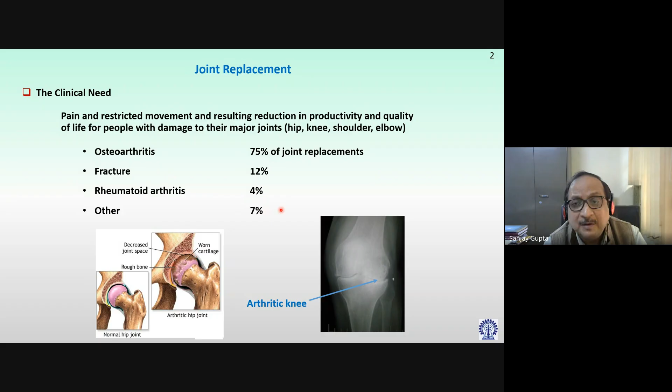Now, if we look at the treatment, let us take, for example, one of the load-bearing joints. I hope you understand what is meant by load-bearing joints, because the upper part of the body, we have upper and lower parts. The lower part provides us stability against loads, meaning forces. The upper part, as compared to the lower part, gives us more mobility than stability.

If we consider the shoulder joint, that is probably the most mobile joint within the human body. The shoulder joint provides the maximum range of motion. However, the joint is less stable as compared to the hip joint, which is essentially a ball and socket joint.

Now, we will be concentrating more on the hip in this lecture, because that gives you some idea of the unique problems associated with joint replacements. There are some common problems and certain unique problems related to specific joints. So we would focus this lecture mostly on hip replacement.

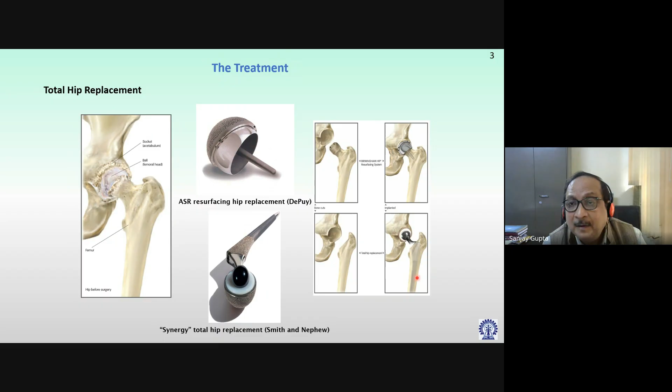Now, the next question is how to fix the implant with the host bone. So we have a cemented type of fixation, and there is also uncemented type of fixation. Cemented fixation, which is an age-old method of fixation of the implant to bone, consists of a material called bone cement.

It is similar to our building cement material, with some properties quite similar to it. It is basically a polymer, polymethyl methacrylate, PMMA, and when mixed with the monomer, it solidifies with time and helps the implant to be fixed within the host bone.

The cemented fixation gives us almost immediate fixation of the implant with bone, but there are certain unique problems related to cemented fixations. On the other hand, we have uncemented fixation, which is more common nowadays because of the inherent problems with cemented fixation.

Uncemented fixation, as you can see here, has basically a biological fixation of the implant with the bone. This is all about osseointegration, as the clinical world commonly calls it—they look at the fixation problem between implant and bone as osseointegration, or the degree of osseointegration. Higher the degree of osseointegration, the higher the strength between the implant and the host bone.

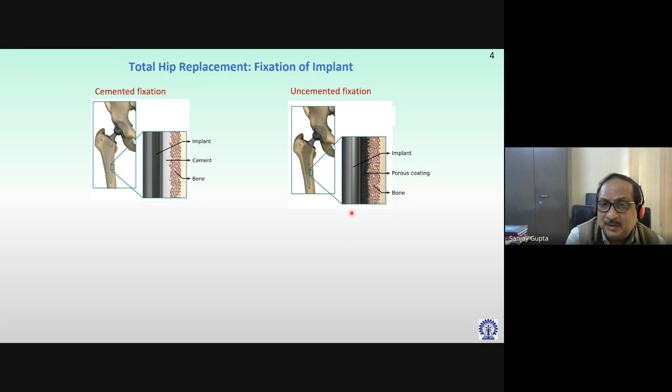If we look more closely into this figure, you can see that bone and granulation tissue actually grow inside the porous layer, facilitating osseointegration.

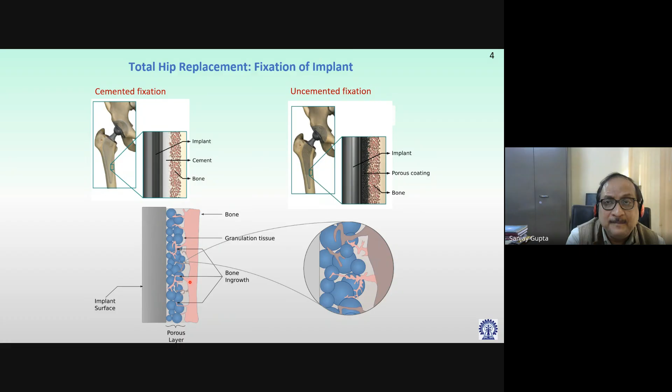Now, when we are taking up implant designs and analysis, the first thing from an engineering point of view, for any application, is we must be aware of the failure mechanisms—that is the worst case scenario. What can go wrong?

Now, the failure mechanisms from the last 30 years of research have generally been of 3 types. Accumulated damage failure scenarios, where the interface stresses lead to implant-bone interface debonding. The interface stresses within the implant-bone configuration may be too high to withstand the interface bond strength, so if the stresses generated become higher at any point than the allowable limits, it will lead to failure.

There is also excessive implant-bone relative displacement that affects the primary fixation. So when you press fit, what is press fit? Perhaps you know that when an object is forcefully pushed inside a cavity, that is called a press-fitted scenario. The object has a slightly greater dimension than the available dimension of the cavity. This situation is often adopted by surgeons to fix the implant primarily inside the bone, so it helps in primary fixation.

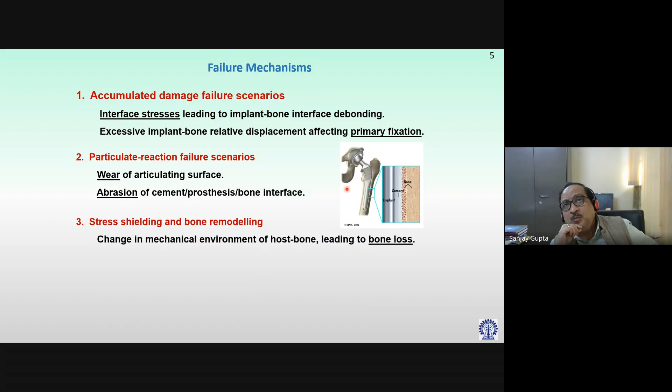Now, how do we assess all these problems? The first thing that needs to be addressed is: is the implant sufficiently well designed to address all these various scenarios? The answer may be yes or no - we don't know. How can we know? There are two ways. One is the clinical way - you implant it within some patient and wait for clinical feedback, which is dangerous to some extent, because the adverse effects of failure will affect the patient.

So over the last 30 years, there has been a huge effort that went into preclinical analysis - that is, using finite element models and finite element analysis based on precise CT scan data of patients, both for natural bone and implanted bone. And it has tremendously contributed towards orthopedic research to test and validate clinical hypotheses.

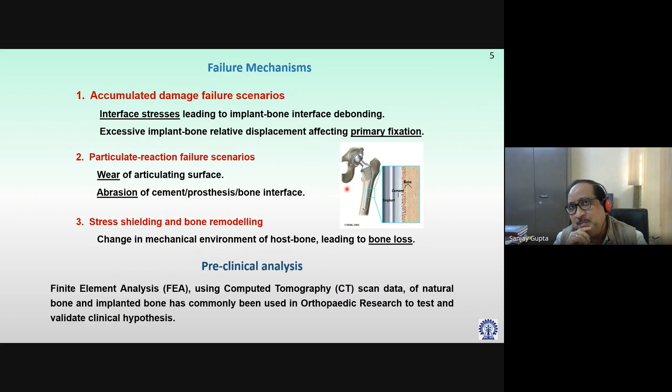So we call that procedure in summary preclinical analysis. I would focus my lecture more on this preclinical analysis and also on validations which are necessary to accept the predicted results coming out of these finite element analyses.

Let us consider, for example, hip resurfacing arthroplasty. How did we define that this was a surface replacement? Essentially a surface replacement - the articular surface is machined and an implant is inserted. Now, it has been observed in clinical studies that immediately after surgery, when the patient is trying to come back to normal life, femoral neck fracture is reported as the most common short-term failure mechanism.

In the long term, there has been also the effect of stress-strain shielding leading to bone remodeling, finally causing implant loosening. So both the failure mechanisms actually affected directly the patients, and this was highlighted in 2008 Journal of Bone and Joint Surgery, American volume.

And I had the opportunity to work with DePuy Johnson & Johnson in the United Kingdom. During that time, there were big investigations on the mechanical causes of failure that was leading to the biological failure of these implants. It was found that stresses and strain actually are causing the short-term and long-term failures. So I'll try to explain in short how these things were done.

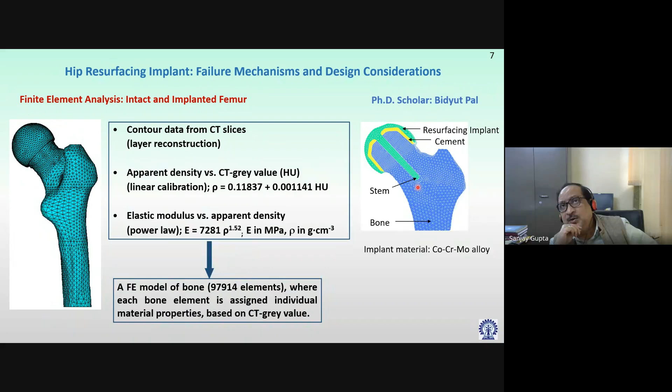Now, where we actually tried to intervene and change the surgical procedure in such a way so that this implant can be beneficial. It not only led to change in the surgical procedure, it also led to change in the design of the implant.

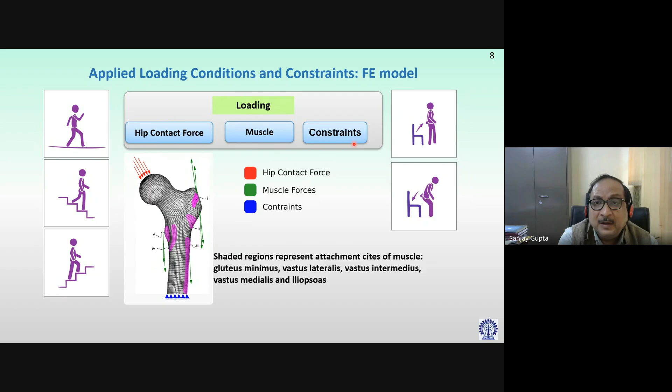Now, what is this adaptive bone remodeling? It is a phenomenon of the bone tissue that explains the response of the bone tissue to significant alteration of its stress-strain mechanical environment. Remember, the whole bone remodeling simulation, as I explain, is based on loads. There are other factors, like metabolic factors, that can also affect bone remodeling, but the predominant factor that affects bone remodeling after implantation is load driven.

Let me explain in a short and easy way how we actually do the formulation and implement it in the form of computer simulation. Bone adapts its structure in accordance with the altered mechanical environment by the process of bone resorption, which is essentially an activity of the osteoclasts, and bone apposition, which is an activity of the osteoblasts. The rate of bone loss or gain is basically related to the difference in the mechanical stimulus. This is a very important parameter that governs the bone remodeling process.

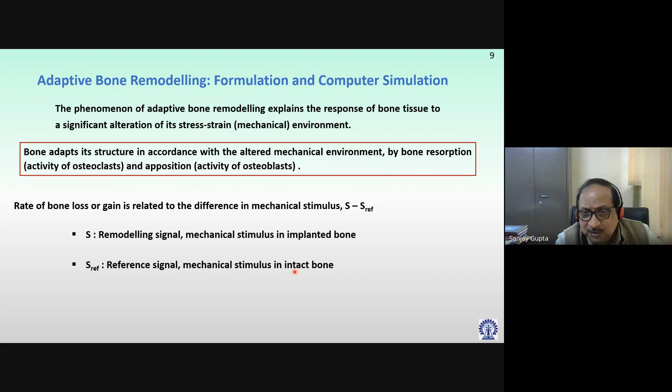One is after implantation, the other is before implantation. So the difference is basically the driving force that triggers bone remodeling, as I already said. Now, what is this mechanical stimulus?

Mechanical stimulus is strain energy per unit of bone mass averaged over the loading history. These are all solid mechanics terms, commonly used for structural analysis of machine elements or structural elements, and these are very common words.

People from technical backgrounds, particularly mechanical or civil engineering students, know this pretty well. Here the elastic strain energy UI per element corresponds to a load case. Then we have the total number of load cases. As I explained, we have load cases arising from different physiological activities. If it is 5, then the number is 5; if it is 4, the number will be 4. And rho is the bone apparent density.

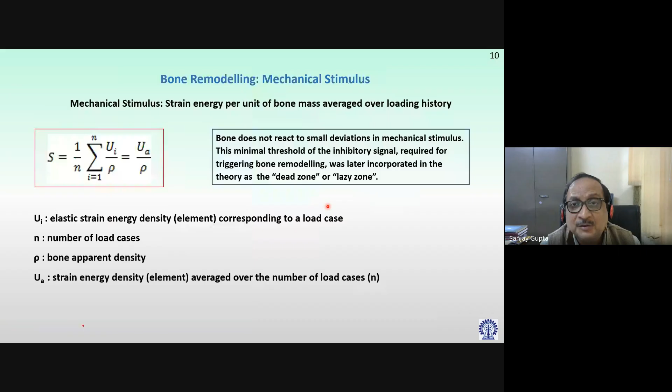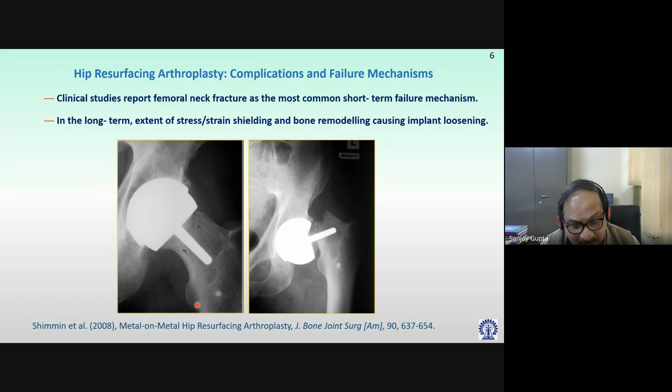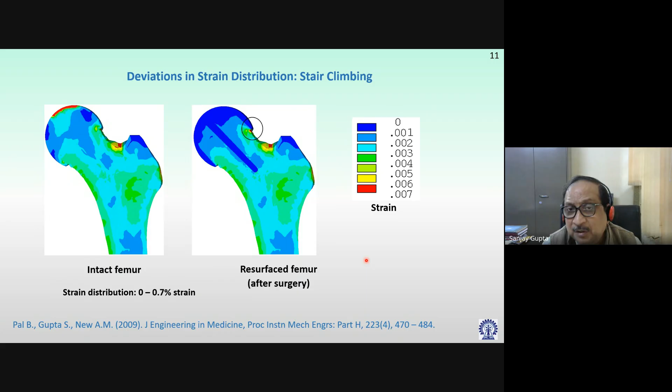If I go back, you see here a black line progressing from the top superior part of the femoral neck and progressing towards a catastrophic failure of the whole new surgical construct. We had published this work quite some time earlier, in 2009, and thereafter you can see this is the area which is triggering the crack initiation and crack propagation inside the implanted bone.

I just gave you a glimpse of how these predictions from numerical simulations are useful in identifying some clinical failures, which are actually difficult to analyze using just patient feedback data. Now, clinical failure is something which is real, okay?

Computer simulation has a lot of problems, okay? Personally, I've been working with it for more than 30 years, and I don't believe computer simulations, okay? For some people it's a holy machine - everything that comes out of a computer is acceptable. For me, no, it is not acceptable, okay? You never know where you have made mistakes - you might have made mistakes in input variables, you might have made mistakes in procedural steps. And finally, what comes out of the black box, whether or not it is useful or irrelevant, depends finally on experimental validation and verification.

So we had undertaken this project in collaboration with the University of Southampton under the UK-India partnership program, and our PhD student had done some experimental validation. We had designed and fabricated a special loading mechanism, as you can see on the right, that simulates the loading of the hip as it would be in a natural femur. Then this had an implant, as you can see here, the shiny resurfacing implant. And of course this bone is not real bone, it is synthetic bone - it's called Sawbones, quite expensive to get, and we fortunately could afford it from our project.

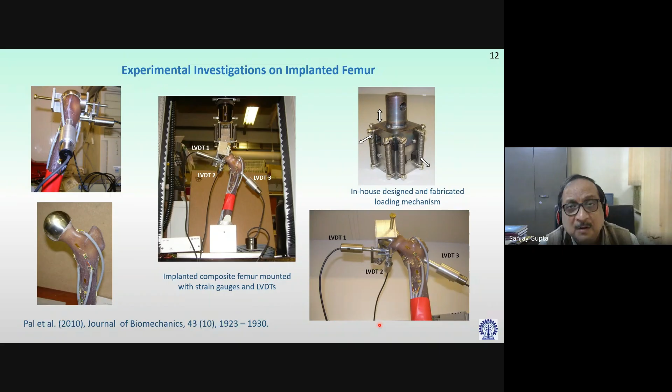Now, when we compared experimental strain versus the numerically predicted FE strain, we did get some very good agreement. This is all about statistical analysis, and I hope many of you are conversant with it. You have to really compare the raw data of the measured strain versus the finite element strain predicted by the FE models. And this is what we get.

So R is 0.94, slope 0.86, with intercept minus 109 microstrain. In case of resurfaced femur, we see an even greater correlation coefficient and less intercept. The slope is supposed to be actually more close to 1, and the intercept, as you know, y equals mx plus c, so if it is fully in agreement, then slope m should be equal to 1 and c should be equal to 0.

But this is not always the reality. Reality is when we actually test data. So the symbols basically indicate strain gauge output for all load cases. But we, in a way, may conclude that the finite element models are actually predicting values which can be accepted for clinical relevance.

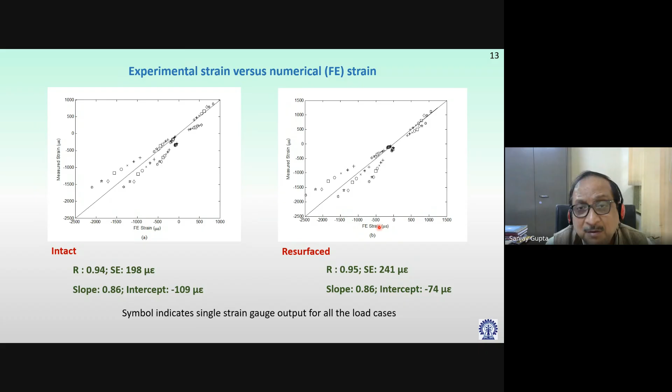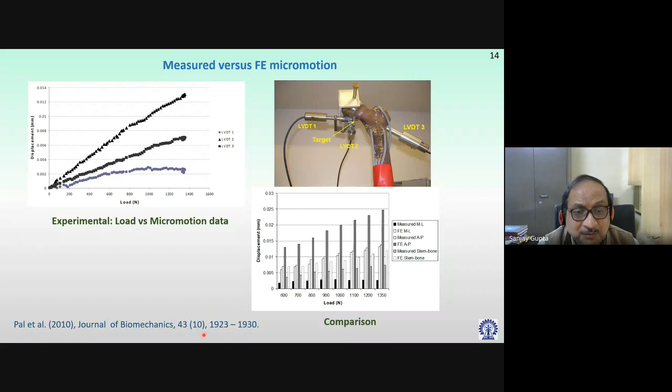If you compare measured and FE micromotions, micromotions actually mean implant-bone relative displacements. Here we are comparing along different directions. This is the measured values, load versus displacement. Displacement actually means implant bone displacements, and the comparison is reasonably acceptable. We published this in the topmost journal of our field, the Journal of Biomechanics, in 2010.

Now, we did come up with predicting successfully the causes of failure. But what is the step forward? The implant was eventually removed from the market because there were many lawsuits against it, and so what we had taken up as a new project was to develop a new implant.

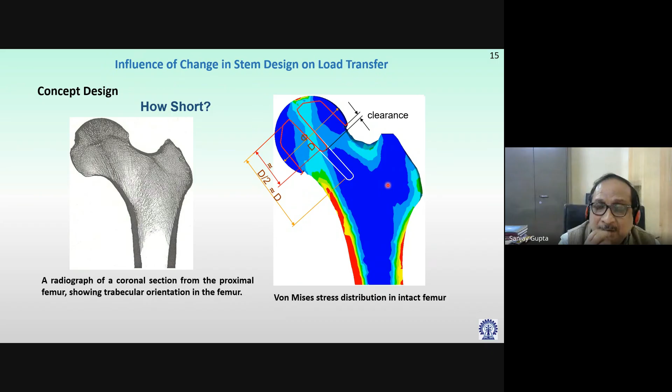We tried to modify the metaphyseal stem. The metaphyseal stem originally was this size. We tried to optimize the length of the metaphyseal stem. Earlier this dimension was equal to the diameter of the femoral head. Now we arrived at a dimension which is d/2, that is equal to the radius of the femoral head, the red line as you can see. And interestingly, this gave us a completely different picture of the stress distribution as compared to the earlier long stem version.

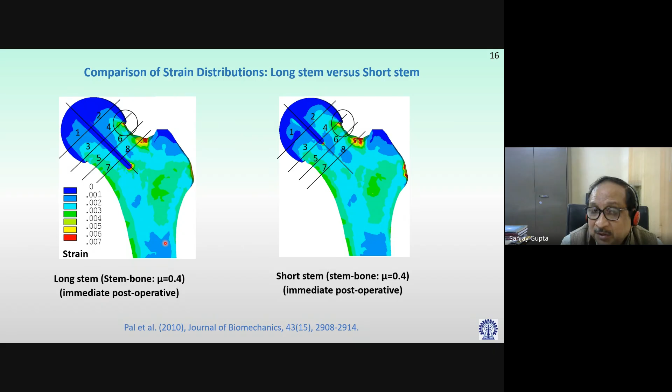So here come some of the results. For the long stem, we did simulate friction between the stem and the bone. This is the immediate postoperative strain distribution. For short stem, you can see here, the strain concentration is more at the tip of the stem. And although there exists some amount of elevated strains, this elevated strain was quantitatively less compared to the original long stem implant.

Now, what are the predicted changes in bone density if we compare long and short stem designs? You can see here for long stem, this is the predicted bone density changes based on bone remodeling theory. And in case of short stem, instead of bone loss, we actually see some bone gain in this region. If you compare directly the second picture with the third picture, after equilibrium in bone remodeling, we see a more favorable bone density distribution compared to the original bone density just immediately after surgery.

So bone density doesn't change immediately after surgery. This is basically the original configuration, and this is the configuration after bone remodeling, for short stem and long stem. You can see that this second figure gives a more favorable stress and bone density distribution as compared to the long stem design.

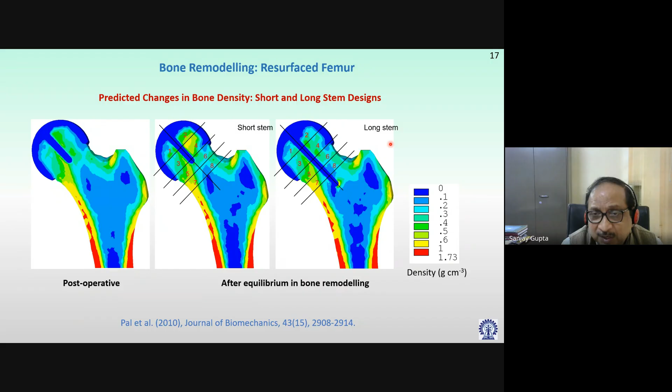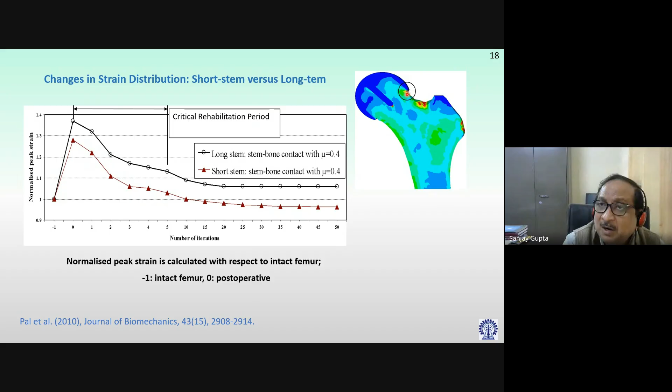So in many cases, the patient is advised to undergo partial weight bearing by using crutches, so that during this immediate post-operative critical rehabilitation period, you can avoid high strain and let the bone heal with time and offer more strength so that there is no failure initiated from the superior femoral neck junction with the implant that causes this failure.

Now, the next lecture I would focus on is on the pelvic bone and optimal design considerations of uncemented acetabular prosthesis. We had focused earlier on femoral implants, and now we'll be moving into the more critical acetabular component loosening.

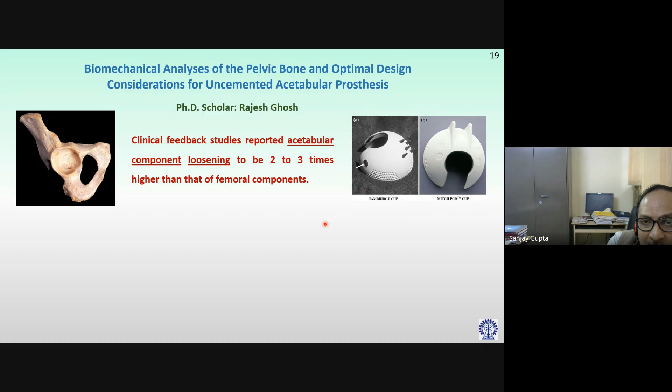Oops. What happened? Yeah, sorry.

Now, one of the major causes behind this aseptic loosening, failure of the implant, is considered due to mechanical factors. Combined with those clinical feedbacks and desired investigations regarding the mechanical factors behind these failures, there was another demand arising: for more durable implants, because more and more young and active patients underwent joint replacements, thereby triggering increase in the life expectancy of also the older patients. So coupled with younger patients and increasing life expectancy of older patients, the demand for more durable prosthesis serving the affected patients was increasing.

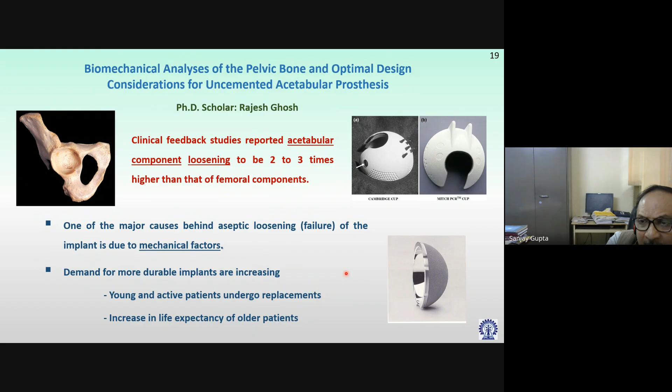So again, if we look into it, there is the same procedure of generating finite element models of the intact, natural hemipelvis and the implanted hemipelvis models based on the procedure I already explained. But here the equations are different because it is a different bone - pelvic bone, not the femur. So we have different calibrations for allocating bone material properties.

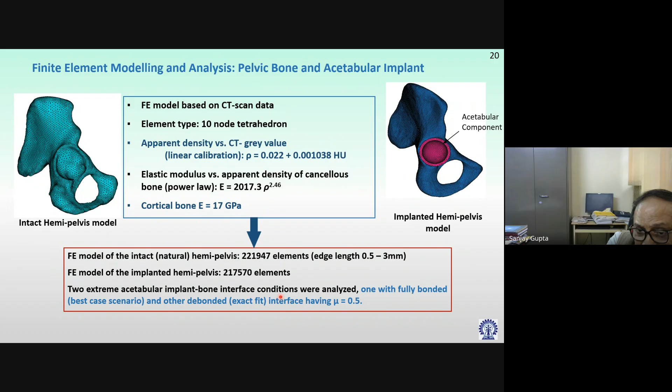Finite element model of the intact natural hemipelvis in this case had about 222,000 elements, and for the implanted it was also around 220,000 elements. Two extreme acetabular implant bone interface conditions were analyzed: one fully bonded, and the other debonded exact fit interface having mu equal to 0.5, where mu is the friction coefficient between the implant and the bone.

The constraints applied to these models were mimicking the physiological constraints, which is fixed boundary conditions at the pubis and the sacroiliac joint.

We had actually been very careful about how to distribute the predominant hip joint force from the center of the femoral head, how it will be transferred onto the pelvic bone. We actually modeled the cartilage layer in between, with bonded and debonded interfaces, and in a way we can mimic the natural load distribution from the femoral head to the acetabular cavity.

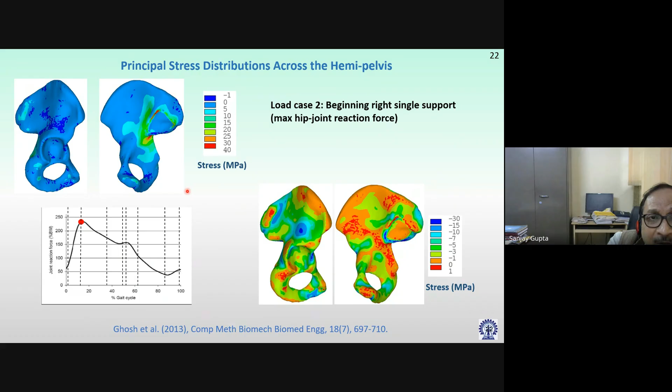Now this is the principal stress distribution. For the maximum hip joint reaction force, one is a tensile stress distribution, another is a compressive stress distribution.

Now again, we are critical, as I told you, about the results predicted by finite element models. After all, these are models, and you cannot believe results unless validated. So there was a new technique, digital image correlation, a non-invasive technique, and we tested the pelvic bone specimen using this DIC technique. It is a non-contact optical metrology to measure full field stress distributions and surface deformations on practically any material subjected to a driving force. The idea came from the aerospace industries, who had been trying to measure stress and strain distribution in aerospace components, so we adapted that method for testing bone samples as well.

But remember, this is a full field technique, giving full field deformation patterns and stress strain distribution. It's based on 2 cameras, and the specimen has white paint with randomized black speckle patterns. Through the cameras we can track the deformation of the speckle patterns before and after loading. There's a lot of mathematical transformation involved in getting results from this optical technique.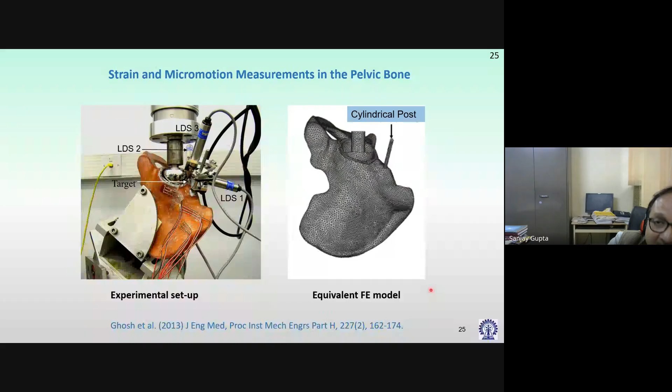We also compared the predictions with our age-old strain gauge technique. The paint was removed from the surface of the analog bone, and we fixed strain gauges and strain rosettes, as well as linear displacement sensors along 3 orthogonal directions, LDS 1, 2, and 3. We modeled this whole thing, generating the equivalent FE model, so we were in a position to compare the results.

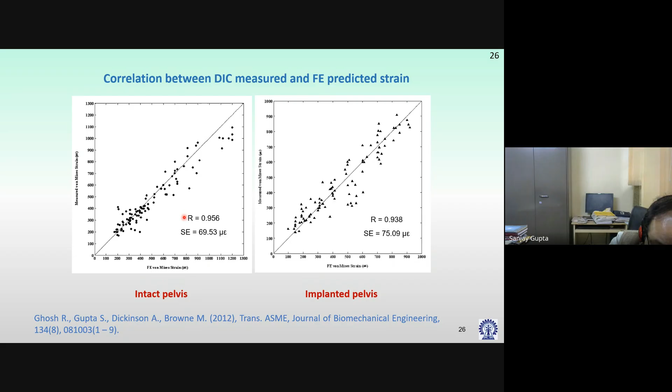So we were in a position to further investigate the consequences of inclusion of a prosthesis. We used another submodeling technique, used in the aerospace industry, to focus our attention on the acetabular region, because this is our region of interest. A pelvic bone is a large bone, but our main interest is what happens in the domain of inclusion of this acetabular component.

So we adopted this submodeling technique where we introduce cut boundaries and transfer the displacements from the original mother model, or the full model, at the cut boundaries. While incorporating this procedure, we are including the elastic properties of the remaining part of the pelvic bone, which we are not actually modeling. It's a trick by which, when comparing a full model with the submodel, we can see exactly similar stress distribution.

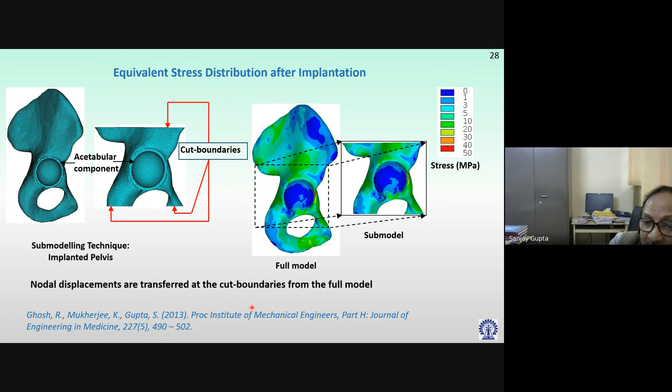However, if you look closely here, there is some deviation. This is because the full model is made up of coarse size elements, whereas here the size of the element is smaller. Therefore, the description of the bone material properties is better obtained in the submodel compared to the full model, which is rather coarse. So the finer the model, the better the predictions. But overall, both models gave consistent results, except at a few locations, since we have a finer model in the submodel. The idea was transferring the nodal displacements at the cut boundaries from the full model to the submodel.

So with that basic model at our disposal, we were in a position to assess all the failure mechanisms that arose basically out of clinical feedbacks. Now, on the left, you have the bone density.

So this is basically the bone density for the intact bone. You can say immediate post-operative means intact, because the bone density doesn't change immediately after surgery. After bone remodeling, this is the metallic prosthesis. You can see how bone density has reduced.

So the blue means less. Just a moment, why don't I see the... Oops. Yeah.

The color blue is actually less bone density. When you move towards more red, it is more dense bone.

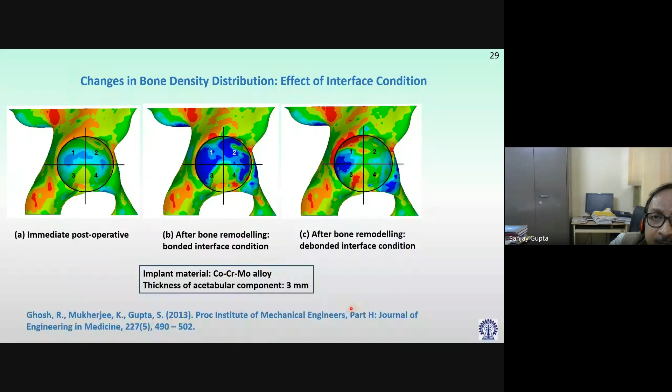Now we had taken up 3 prosthesis designs. One was 3 mm ultra high molecular weight bearing surface, with this design with a horseshoe cutout, mimicking the structure of the acetabulum. This was a CFR-PEEK material, and PEEK is a material that is evolving from the biomaterial side. And we had used a hemispherical PEEK cup as well - 3 materials.

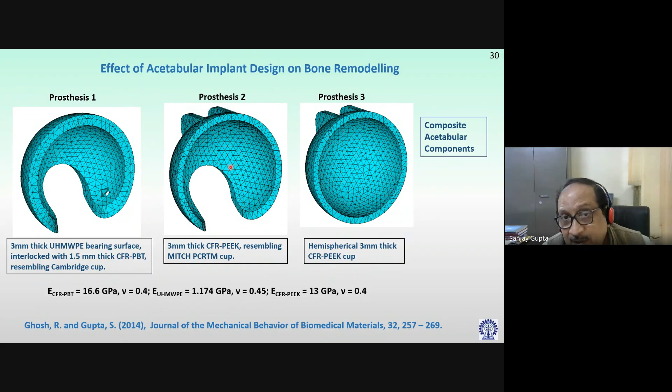So here the total thickness of prosthesis 1, which resembles a Cambridge cup, is 3 mm polyethylene plus 1.5 mm CFR-PBT. So total thickness is 4.5. For the other two, both are 3 mm, but there is a difference in the design. How does that affect bone density distribution after bone remodeling?

So this is the immediate postoperative. You can see 4.5 mm thick. The thickness gives rise to a stiffer implant. Stiffer the implant, more are the adverse effects of bone remodeling. If the stiffness of the implant is less, in 3 mm places, you can see less adverse effects - prosthesis 2 and prosthesis 3.

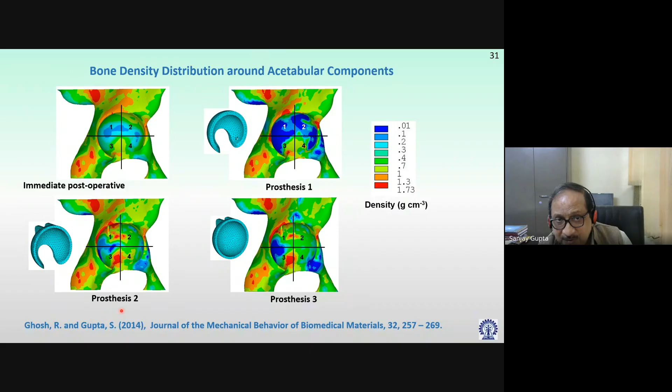If you look at the sectional plots, you can easily see how bone density has reduced with bone remodeling for different thickness of the implant. So here, after bone remodeling with 3 mm thick implant, this is with 11 mm thick implant. So this is the trend, how the thickness and design of the implant affects bone remodeling after implantation.

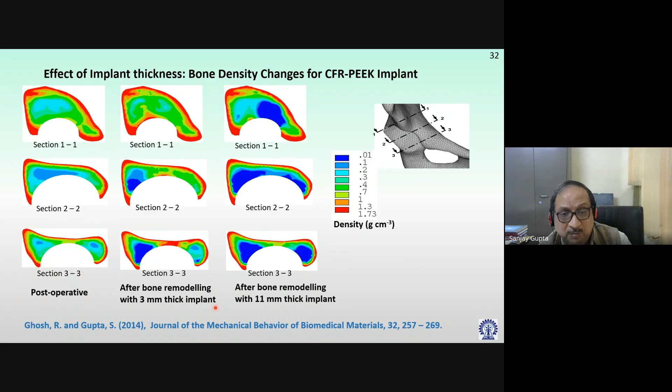Now we arrive at a point where we wanted to investigate and try to come up with optimized implant designs. And these optimum implant designs - the objective was basically to reduce the failure mechanisms.

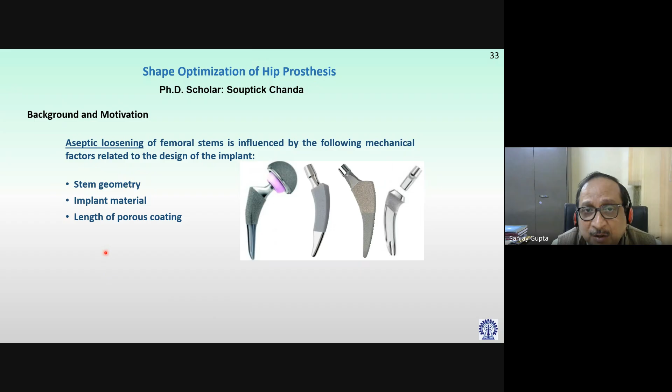Now, aseptic loosening of the femoral stem is influenced by mechanical factors - as you can see, stem geometry, implant material, and length of porous coating. We had undertaken this study to determine the optimal combination of these factors towards improved hip prosthesis. This was the basic hypothesis and objective, so it was necessary to investigate the optimal combination of these factors.

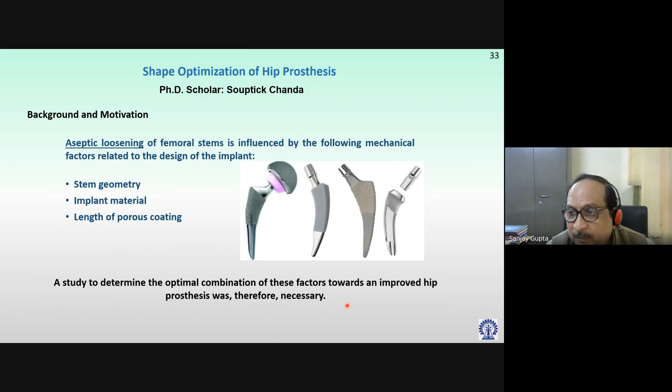Now this is a highly mathematically intensive study where we have taken up the method of parameterization. As you can see here on the left, I'll try to explain it simply: we have taken 4 key cross-sections of the hip implant. From the top: 1, 2, 3, 4, and how the shape of the cross-section and the design of the implant together will affect the outcome.

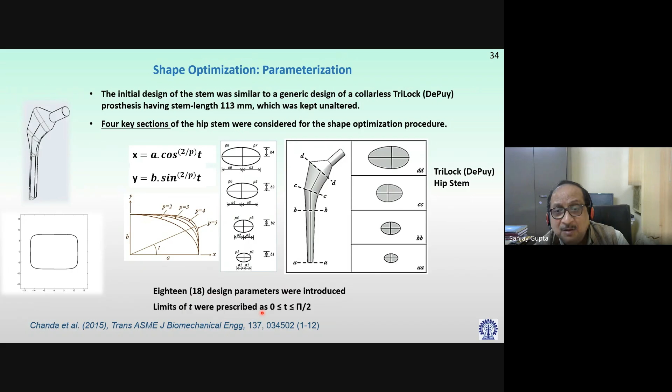Now, what is this multi-objective shape optimization protocol? You start with a CT scan image, then generate a solid model, then do the virtual implantation, do the automated volume meshing, do the finite element analysis using ANSYS or finite element software or Abaqus, anything, and then you introduce the non-dominated sorting genetic algorithm - NSGA. So this basically is an optimization procedure, and the genetic algorithm scheme was found most suitable for this sort of contradictory design parameters, to analyze contradictory design parameters.

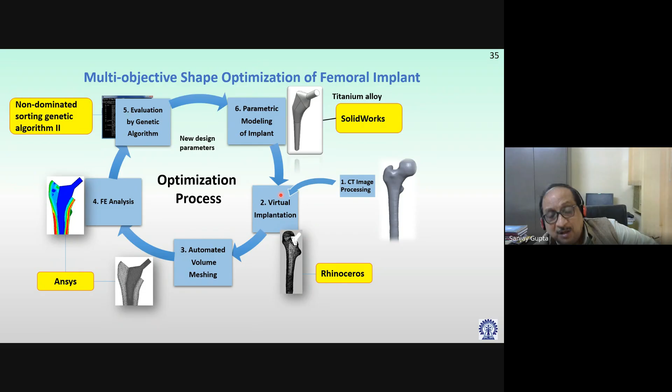And then basically you generate new shapes of the implant, and you keep on doing this until you arrive at different results predicted by the different shapes of the implant.

But before that, for the fully automated shape optimization framework, I'd like to discuss a little bit about the salient features of this fully automated shape optimization framework.

The geometric parameters were introduced basically to characterize the femoral stem shapes. Objective functions were formulated based on two common failure mechanisms of uncemented total hip replacements.

This optimization scheme comprises a parametric implant model generator, a script for virtual implantation, an automated mesh generator and finite element analysis script, and finally an optimization controller.

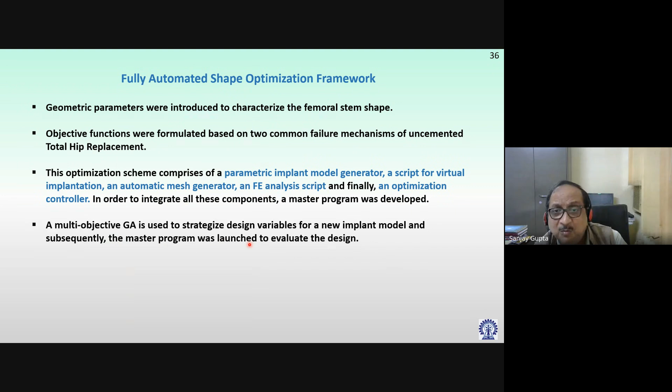So in order to integrate all these components, a master program was developed. A multi-objective genetic algorithm scheme is used to strategize design variables for a new implant model, and subsequently the master program was launched to evaluate the design.

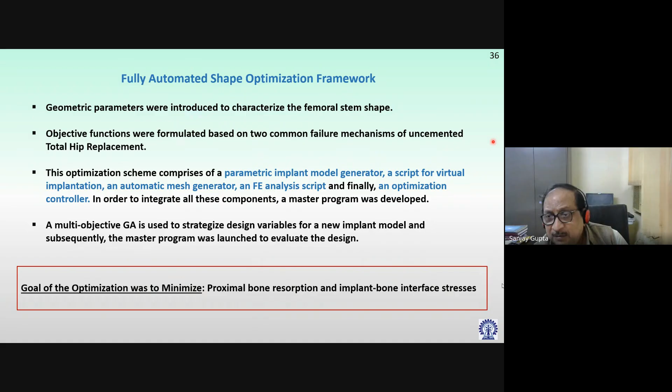So what was the goal of the optimization? It was to minimize proximal bone resorption and implant-bone interface stresses, which are common failure mechanisms.

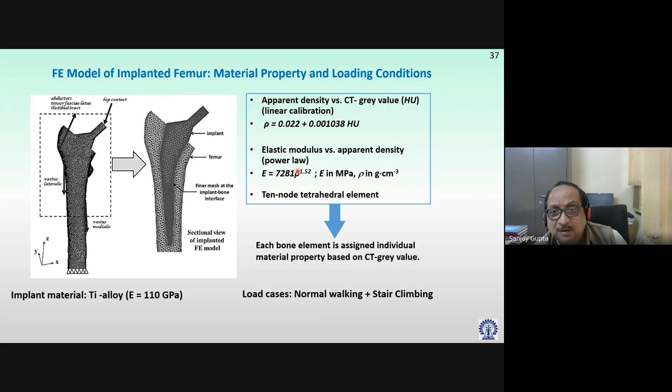So again, just going through the generation of the finite element models in detail here, I think we need to go quickly through this slide because we have already discussed that.

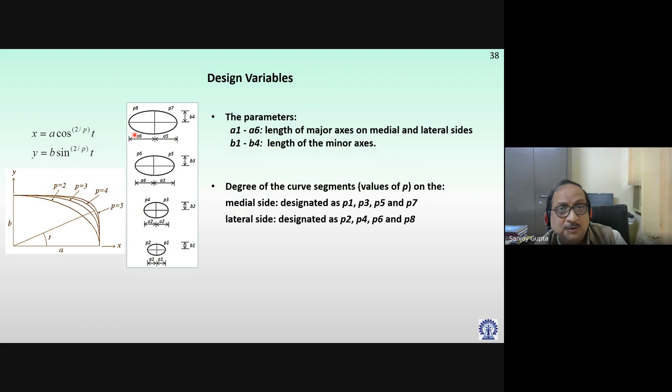Design variables, you can see the parameters A1 to A6, B1 to B4, and the degree of the curved segment, the values of P. So you have different values on the medial side and the lateral side. On the medial side it's P1, P3, P5, P7, and on the lateral side it's P2, P4, P6, P8. All these are shown here in the figure. So this is how you parameterize the design variables.

A total of 18 design parameters were introduced as design variables for the modeling purpose, and the design variables had lower and upper bounds and functional constraints in order to achieve clinically admissible shapes.

There are also recommendations from the surgeons that we cannot go below a certain dimension, we cannot go above a certain dimension. So the clinical feedback is considered as a sort of constraint, functional constraints, in the whole optimization procedure.

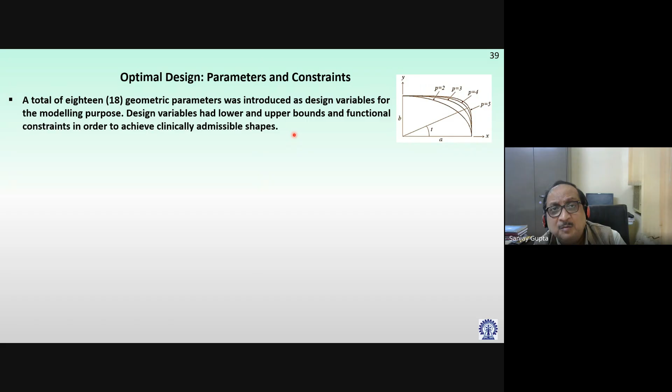The nature of the stem transverse sections varied from medial to lateral side by changing the degree of the cross-sectional parameters on both sides of the stem, while maintaining continuity at the intersection of both segments.

Furthermore, it was also required that the width and thickness of the cross-sections would decrease from proximal to distal end. Now, what is proximal? Proximal is on top, distal is below - these are clinical terms. So proximal means on top, distal means below. So as we move from top to bottom, basically the width and thickness of the cross-section should reduce.

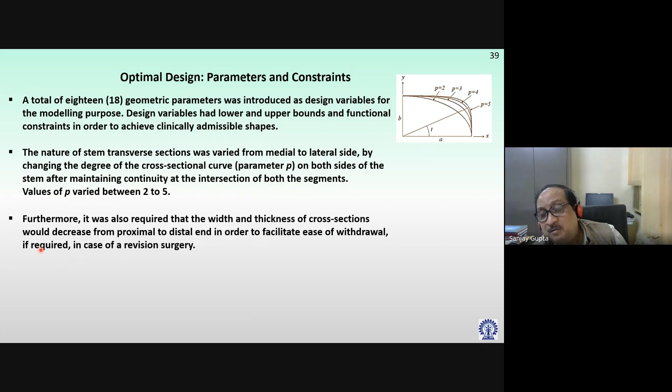This is required to facilitate ease of withdrawal of the implant in case of revision surgery. So all these recommendations have to be implemented in the whole procedure.

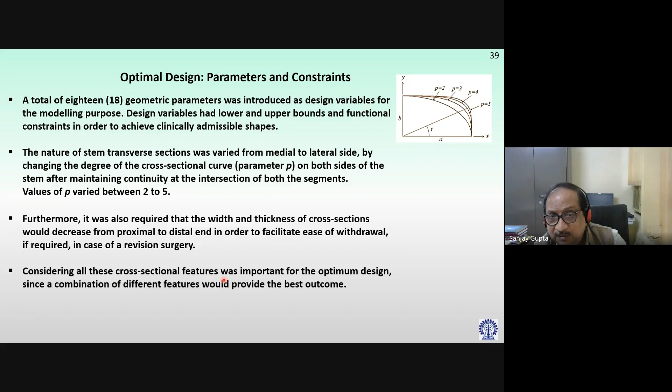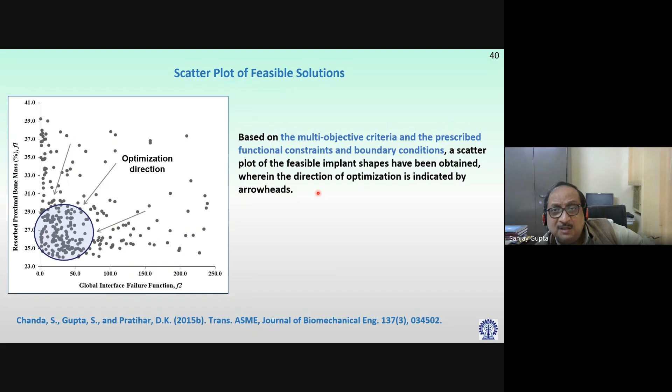So based on the multi-objective criteria and prescribed functional constraints and boundary conditions, a scatter plot of the feasible implant shapes has been obtained, wherein the direction of the optimization is indicated by the arrowheads.

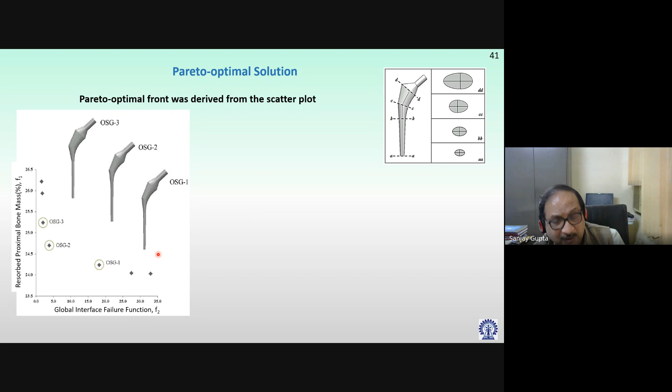Instead of a single optimum solution, there is a set of trade-off solutions, which is generally known as the Pareto optimal solution. So the Pareto optimal solution is a set which is derived out of the optimal solutions, a subset.

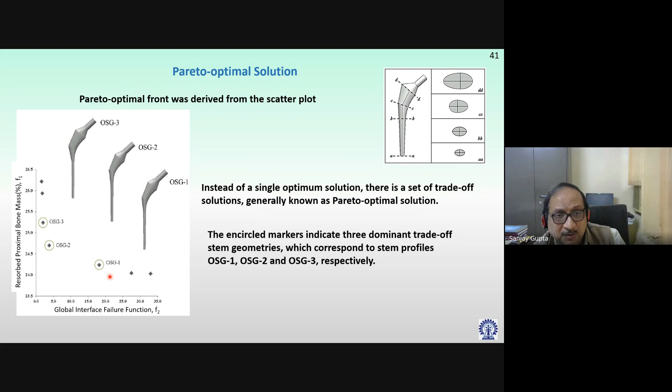The encircled markers indicate the dominant trade-off stem geometries, OSG 1, 2, 3, corresponding to different stem profiles.

Now we come finally to compare that we have obtained OSG 1, 2, 3, and how it compares with the initial Trilock stem from where we started. That is the standard shape of an implant, hip implant, used in the market.

So we have come to a point to say how mechanical factors actually govern the different clinical outcomes arising out of joint replacement. There are many mechanical factors that influence this, and I think that message is clear to the audience. They may not be too conversant with the criticalities or the computer simulations of mechanical engineering, but I hope I could give you some knowledge transfer.

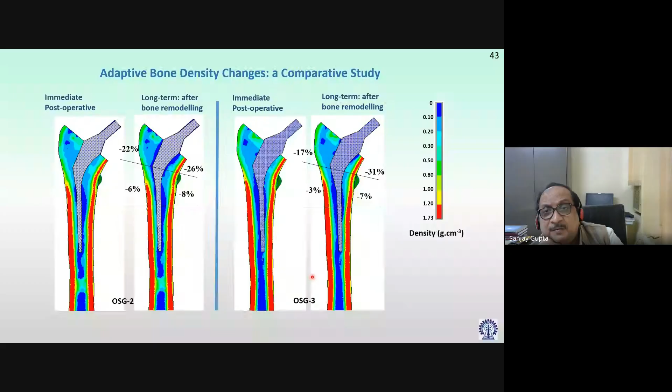I hope I could give you some knowledge transfer on how the mechanical factors govern the design of the implants and how it finally affects the clinical outcome of a surgery. Now, this was a new type of work that we had introduced. This is the last topic, and I would like to cover it as soon as possible.

Now, we have been trying to do some microscale simulation on bone ingrowth, and the background was...

Just a moment, can I take a break? I need a little bit of water. Yes, sir, of course.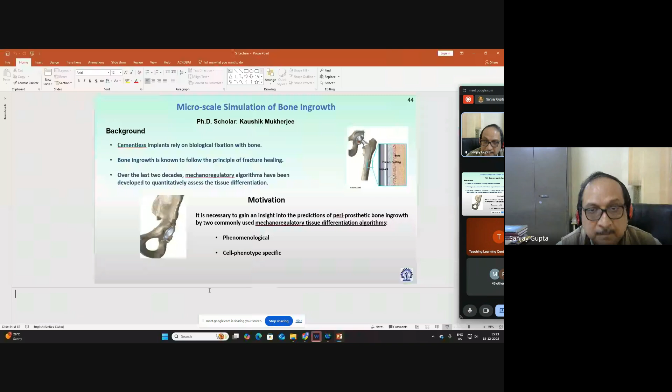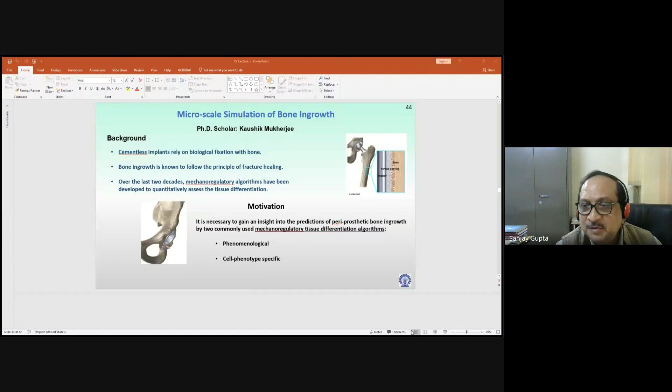So let us get back to the screen. Is it visible? Just a moment. It's not moving, that's the problem. I just want to stop presenting and then redo the whole thing. Is it visible? I don't think it is visible, right? Stop sharing. Hello? No, sir, it is not visible. You have to open your PPT. Yeah, I'm trying to do that. Is it visible now? Yes, sir, now it is visible.

Okay, so welcome back. This is a study we have taken up exclusively with the background that cementless implants rely on biological fixation, and bone ingrowth, which is necessary for fixation of cementless implants, is known to follow the principle of bone fracture healing.

Over the last two decades, we have observed that mechanoregulatory algorithms have been developed to quantitatively assess tissue differentiation. So this work is on predicting tissue differentiation - how the design, particularly of the porous structure, determines to what extent bone will grow to facilitate osseointegration.

That is, bonding between the implant and the bone, needs to be quantitatively assessed. This study was an investigation necessary to gain insight into the predictions of periprosthetic bone ingrowth - meaning periphery of the prosthesis - by two commonly used mechanoregulatory tissue differentiation algorithms: the phenomenological model and the cell phenotype specific model.

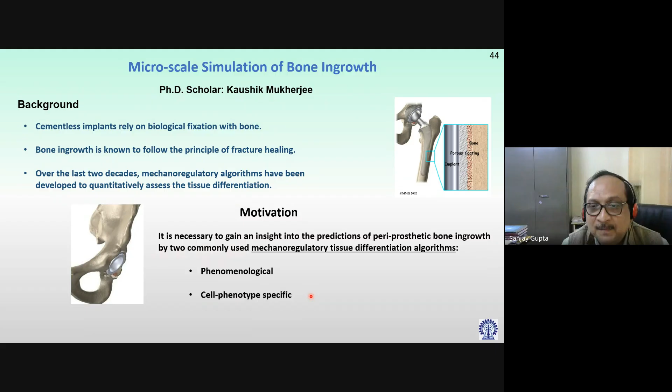In this study, we have used a three-dimensional microscale FE model of the implant-bone interface. We have taken up a Birmingham hip resurfacing implant, as you can see, with a beaded structure. The objective was to quantitatively compare tissue differentiation predictions by cell phenotype specific and phenomenological algorithms. The study focused on the acetabular component, variation of regional bone material properties across the acetabulum, and variation in implant-bone relative displacement across the acetabulum.

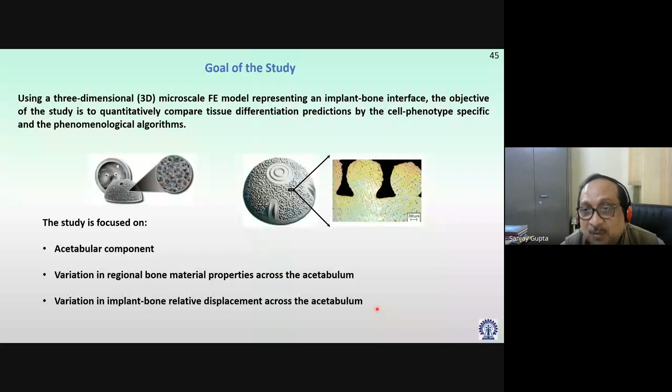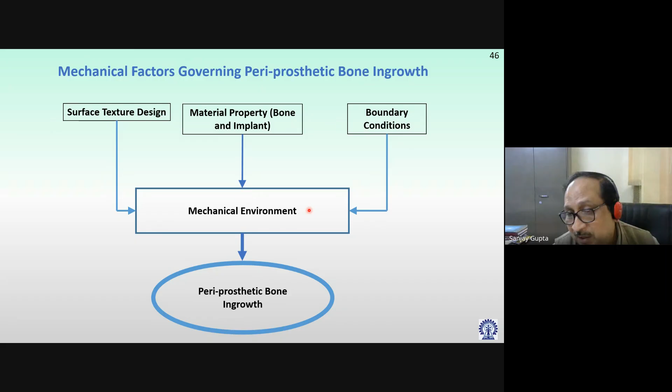Now, the mechanical factors known to govern periprosthetic bone ingrowth are presented here in this slide. We are concerned about the mechanical environment, which is affected by surface texture design, bone and implant material properties - both are important - and the boundary conditions. All three actually affect the mechanical environment, and this mechanical environment in turn affects periprosthetic bone ingrowth.

So we have used the simple diffusion-based phenomenological model. As you can see, this is the differential equation, and it includes cell proliferation and cell migration. k is the diffusion coefficient, and C is the concentration of the undifferentiated MSCs, that is the mesenchymal stem cells.

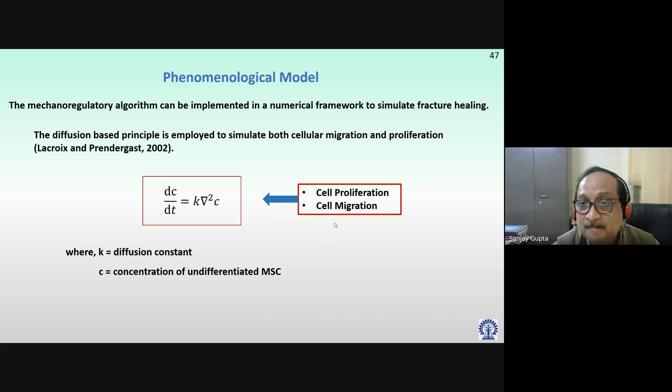Now, what are the differences between these two algorithms? The phenomenological algorithm is diffusion-based modeling; cell differentiation is governed by mechanoregulatory principle, and explicit tissue formation is not modeled. However, in the cell phenotype specific algorithm, cell migration, proliferation, differentiation, and cell apoptosis - that is cell death - are all modeled separately, a more explicit modeling procedure. Extracellular matrix formation and tissue degradation are not considered in this model, and coefficients of all biological phenomena are governed by mechanoregulatory principle.

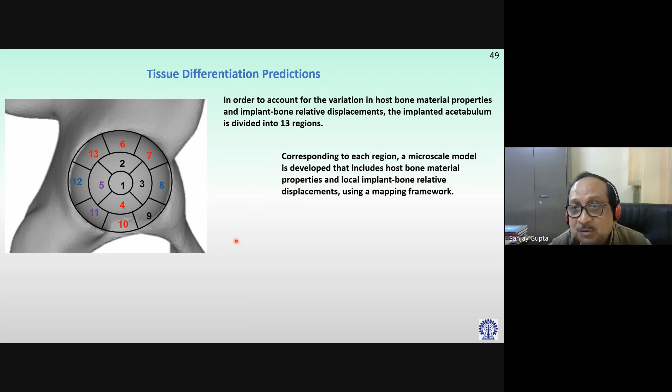Now, in order to account for the variation in bone material properties as well as implant-bone relative displacement, the implanted acetabulum was divided into 13 regions. For every region we have a separate microscale model, and corresponding to each of the 13 macroscale regions of the implanted acetabulum, the average regional elastic modulus is calculated and assigned to the respective microscale model.

Now, as you can see here, we have a few color codes. Red is 12 to 25% bone ingrowth, black is 45 to 55% bone ingrowth, purple is 60 to 70% bone ingrowth, and blue is 75 to 90% bone ingrowth. We have color coded it so that it is easier for you to understand the range of bone ingrowth in different regions.

We are picking one of each color code for more detailed consideration. This is basically the tissue differentiation predictions. Red is immature bone, green is cartilage, and blue is fibrous tissue. In these representative regions 5, 7, 8, and 9, we are presenting the tissue differentiations after attainment of equilibrium.

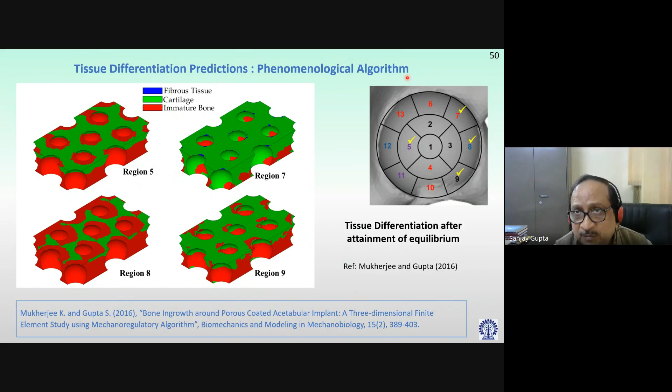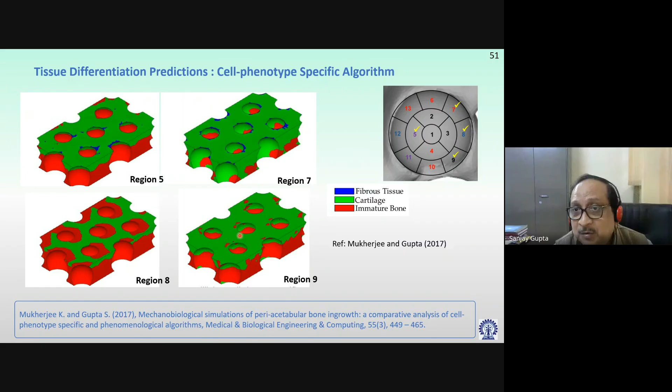If we compare it with the earlier one, that was a phenomenological based algorithm, diffusion based. The next one was a more detailed cell phenotype specific algorithm. There are some differences, but overall it is not too different. If I try to compare these two simulations based on two different models, one is phenomenological results and the other is cell-phenotype specific results, we do see that they almost merge to the same solution, but there is a lateral shift in case of the cell-phenotype specific modeling.

This is a very important conclusion, that although there is not much deviation in the final outcome of the results, there is actually a shift, a lag, in case of when we are considering the more detailed cell-phenotype specific modeling.

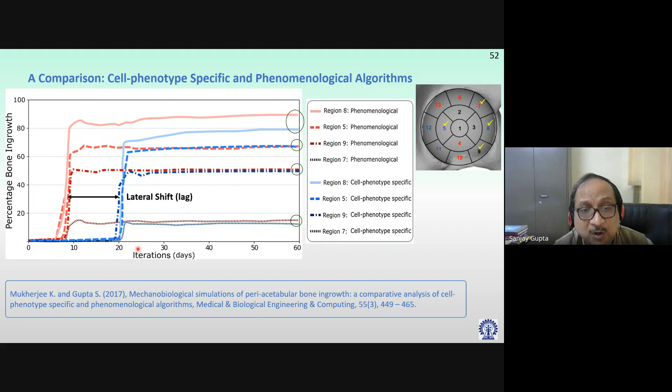Now, if we compare the evolution of the Young's modulus of the newly formed tissue layer, we can see there is a positive progression of increase in all 13 regions. And the strains of this newly formed tissue layer for all these regions actually decrease with time.

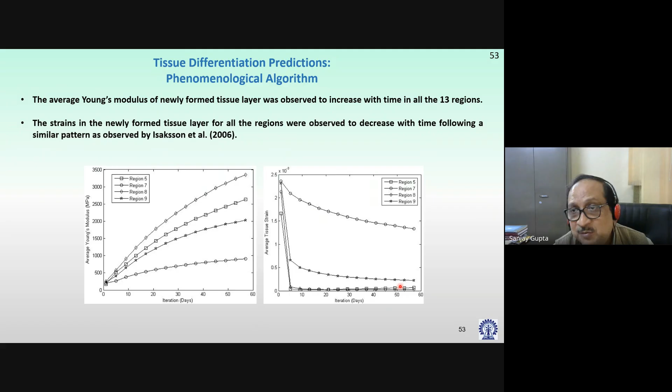We compared our predictions with different results available in the literature, but there was no one-to-one comparison, so it was simply comparing some of the results available at our disposal. The average Young's modulus of the newly formed tissue was observed to increase with time in all 13 regions, and the strains were found to decrease, which is consistent with the basic theory of solid mechanics.

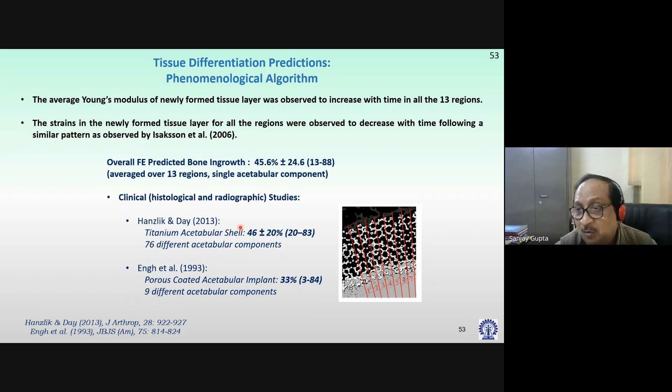The overall FE predicted bone ingrowth in our simulation was 45%, averaged over 13 regions, for a single acetabular component. If we compare it with clinical, histological, and radiographic studies, a study from 2013 gave about 46% from 76 different acetabular components, and one from 1993 gave 33% from 9 different acetabular components. So if we compare very qualitatively, the results predicted by our model were not entirely incorrect.